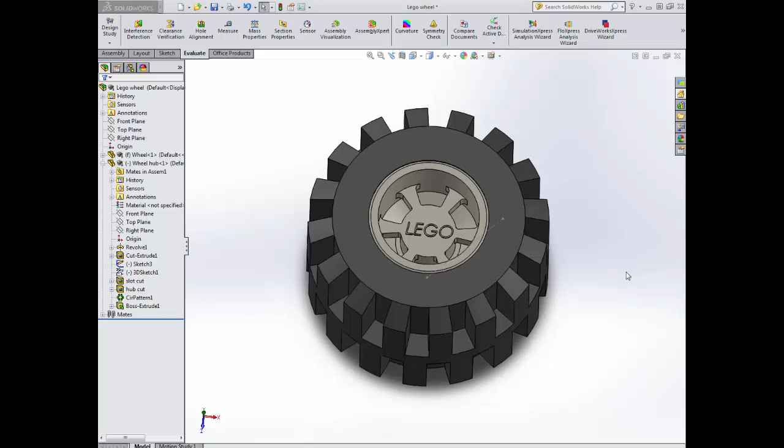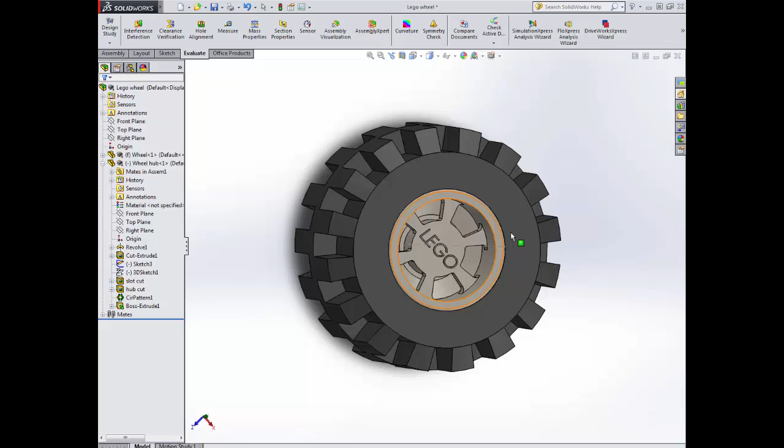Today we're looking at a much more complicated design. Now that you've done some stuff on your own, we're producing more complicated items. What you see here is a Lego wheel. There's a two-part tutorial: the first regarding the hub on the inside, and the second for the wheel on the outside. It's important to understand how the two correlate and how the technical drawing leads you in the right direction. Final assessments in this course involve looking at revolves and understanding what they look like from a technical drawing point of view, using details on the orthographic drawing to then make the product yourself without instructions.

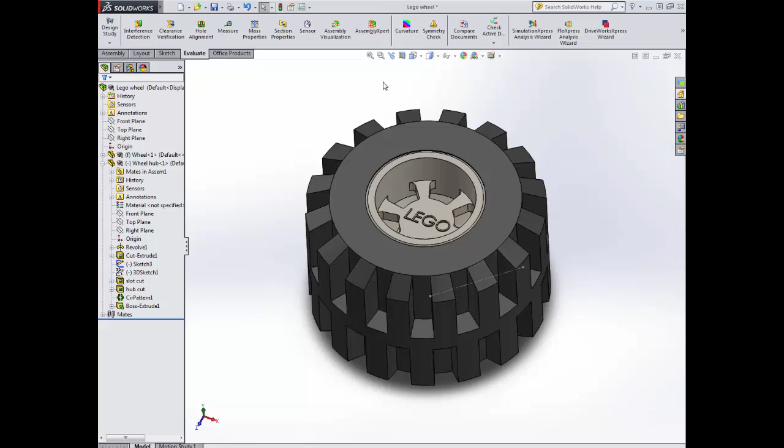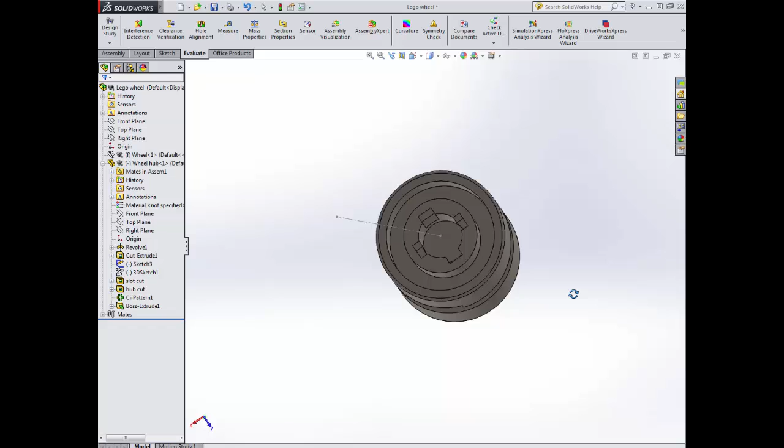If we look at this wheel, we need to break it down into its simplistic parts. At the moment we've got the tyre on, but we're not worried about that right now, so let's look at it without the tyre. The core looks like this - a sort of bobbin shape with two ends that don't match. There's a hub section with the Lego logo on the inside, and there's also a slot that cuts through it, which makes it slightly more complicated than what you've done before.

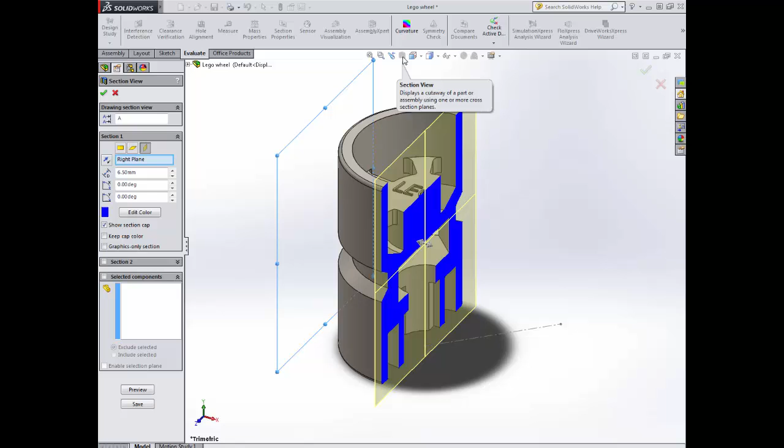So if we think about what this product will actually look like, we need to consider what it looks like internally. What I'm going to do here is section view it so we can see it on the inside. At this stage we'll think about exactly how this looks if we were going to sketch and draw it. I'll remove some detail and go to lines only, so we've got the most basic lines. If I add in the hidden detail in the background, you can see where the lines disappear, because this shape is circular and we're looking at half of it like this.

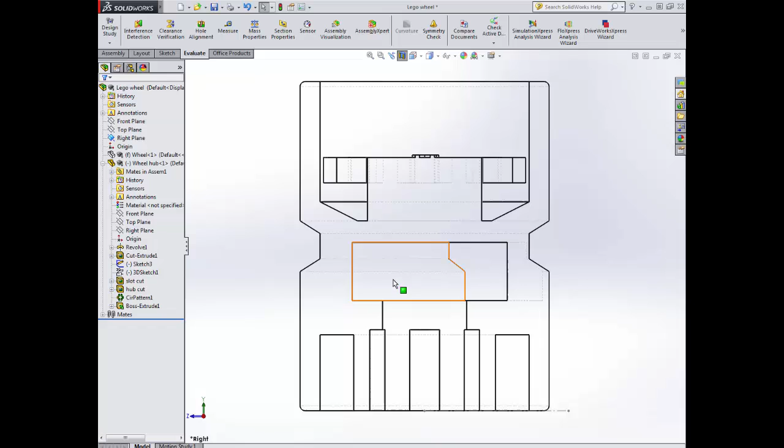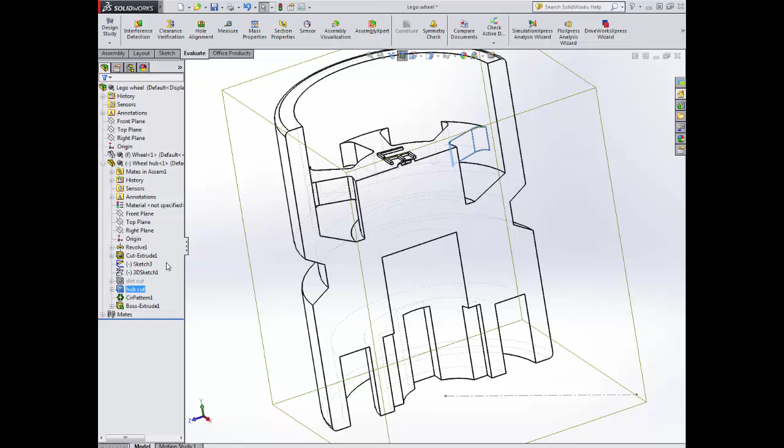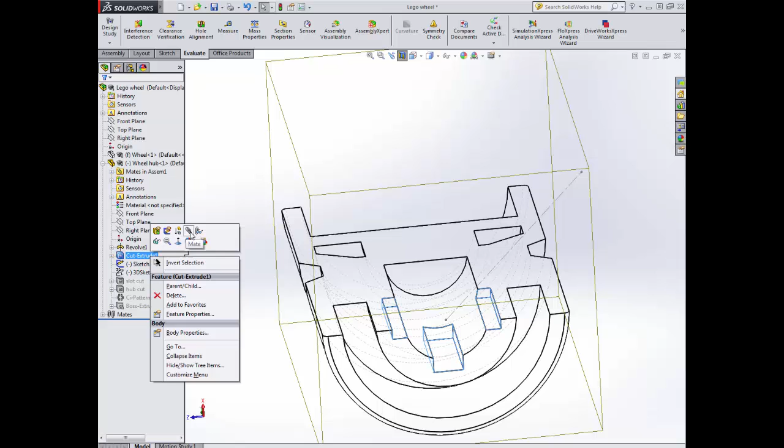The important aspects are the slot that's cutting through, and the fact that these pieces are confusing our ease of understanding this shape in this view, because it's adding lots of extra detail. So I'm going to hide those - there goes the slot, and there goes the cut. If we go back to the same view, there's a lot less lines to deal with. We also have the Lego logo, which we can get rid of. There's also a slot cut in the bottom where one of the cross-shaped end pieces fits in to lock in place. I'll remove that too, getting us right back to just the simple revolve.

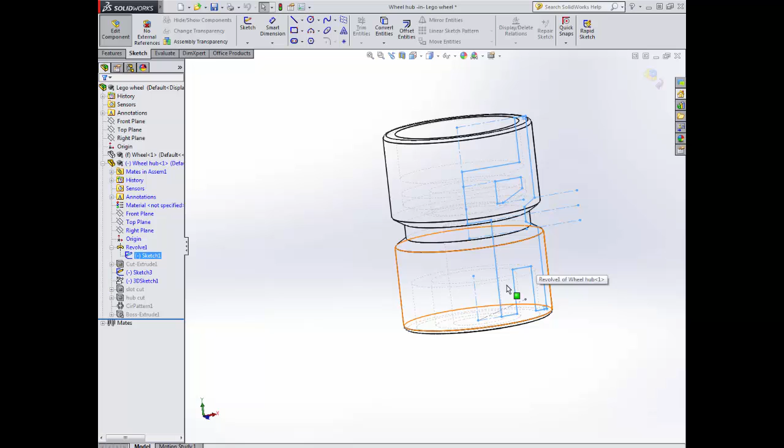Now we've got the bobbin at its most simplistic, we're going to show you the sketch it was derived from. The basic sketch has these two legs and the main body with a hole through it. Everything here is a solid island, and the gaps are holes in the shape which create this hole here, and the hole that spins through the middle, which we can see evidence of cutting through here, and this one which creates the hole at the bottom.

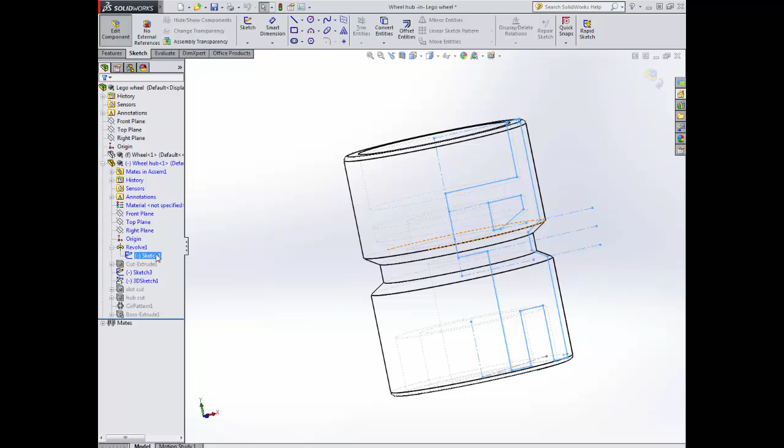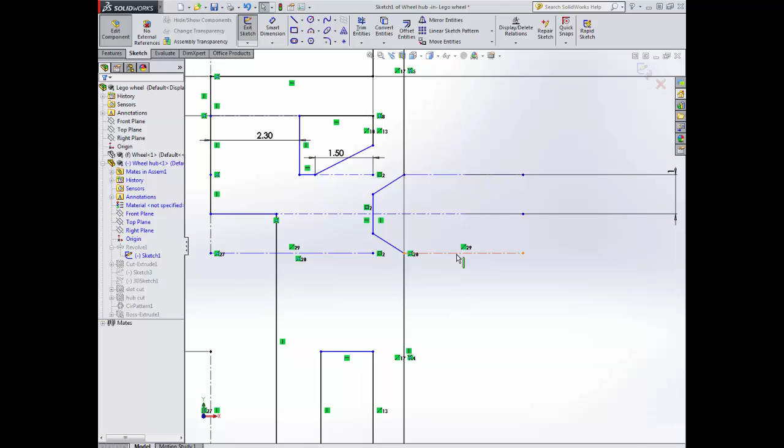If I go to edit sketch, SolidWorks previews what you're going to get in the distance, which can be helpful here. You can see we've got the different slots cutting through. What we want to concentrate on is the actual shape itself - the lines that cut round, a line that cuts in. It's important to realize these thinner lines that aren't blue or black are just showing us dimensions or something else. Equally, these dotted lines simply guide us, and they're evidence of how I drew the shape in the first place and where I went to get measurements.

With that in mind, understanding how that is then revolved around this central line here doubles it into the shape that we have. So down that line, which passes down the middle of here to allow us to see this shape - that's where we get to.

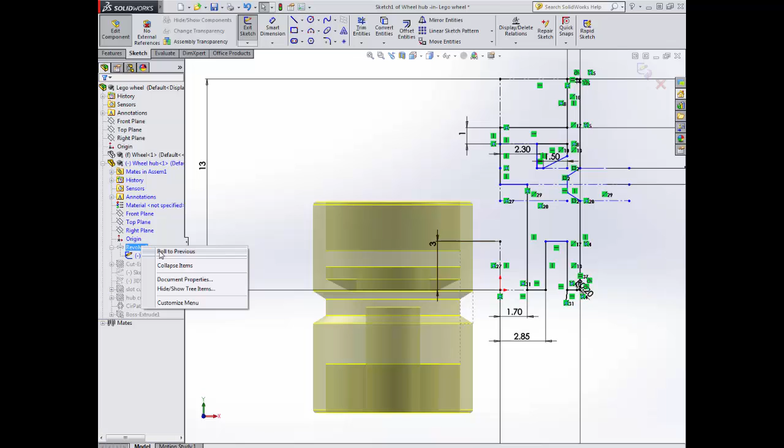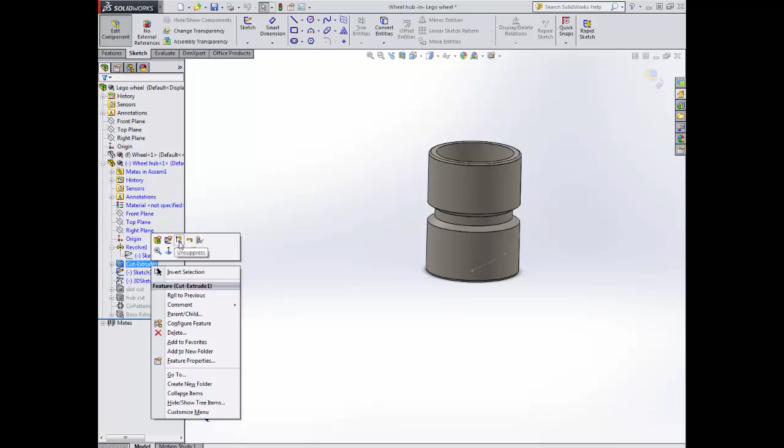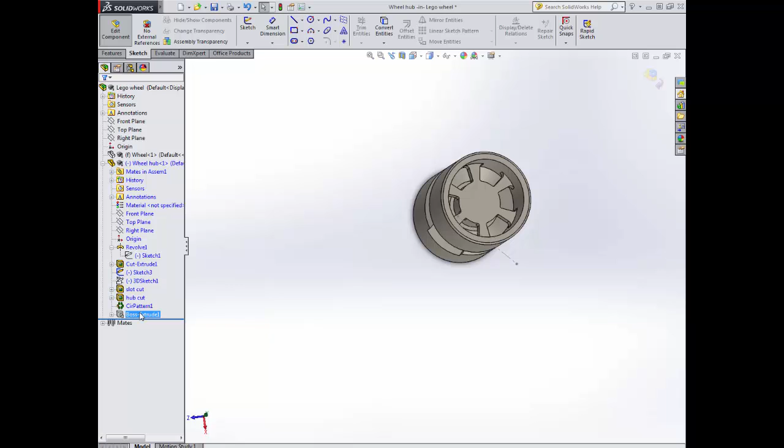So what I'll now do is bring us back to this, and add color back so you can see the shape we're coming back to. Then stage by stage I'll add in the various aspects. The next one was a cut, so I'll unsuppress it and we have the cut that goes in the bottom. We've then got the slot cut - unsuppress that, and that gives us the slot. Finally the hub cut, which if I unsuppress gives us that, then the pattern cut, which does that, and finally our boss extrude gives us to there.

So that's an introduction into getting used to what you're looking at when you come into the drawings. The following tutorial will talk you through how to make the hub itself, and then you'll move on to doing the wheel.